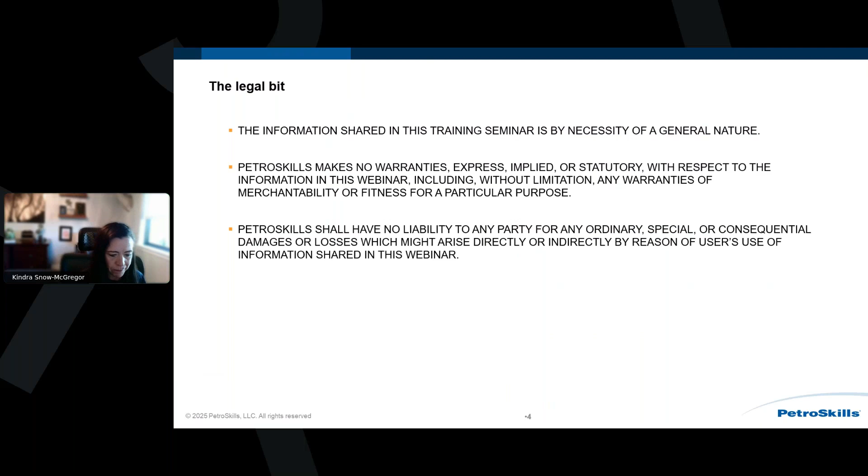What exactly is LNG? Let's take a poll, because I'm curious to see what your thoughts are.

All right, I think we ran that long enough. Notice which components are LNG. 7% said methane only. Are you seeing this on screen? Yes, everyone can see that. Perfect, thank you. 7% said methane only, 33% said methane and ethane, 7% said C1 through C3, and 53% said C1 through C4.

As far as the correct answer, notice LNG can be anything from C1 to C4. What actually sets your LNG composition is determined by the composition of the feed gas going into the plant. LNG is simply natural gas that has been cooled and liquefied to minus 162 C, or minus 260 F.

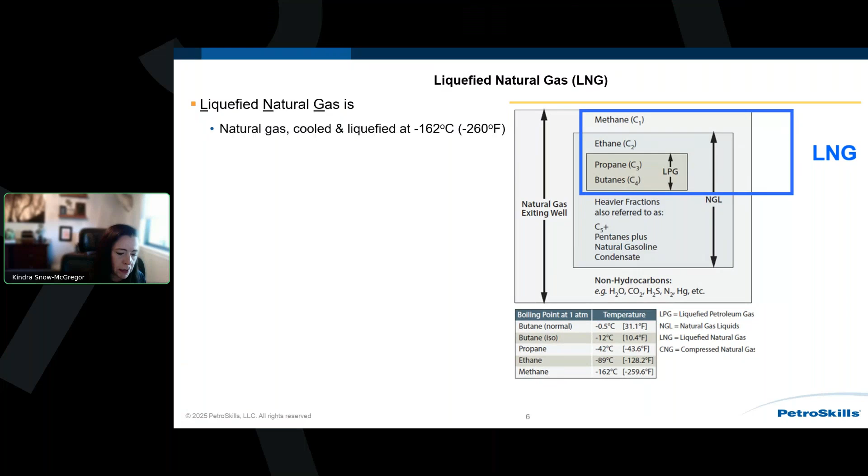It is stored and shipped at atmospheric pressure. So essentially all those big LNG storage tanks and the LNG carriers you see going across the ocean are full of boiling LNG at minus 260 F. We transport the LNG in specialized carriers, trucks, and ISO containers. To put this into perspective, a 175,000 cubic meter ship, the most common carrier size today, contains about 3.6 billion standard cubic feet of gas. So it's a very efficient way to transport a lot of energy around the world.

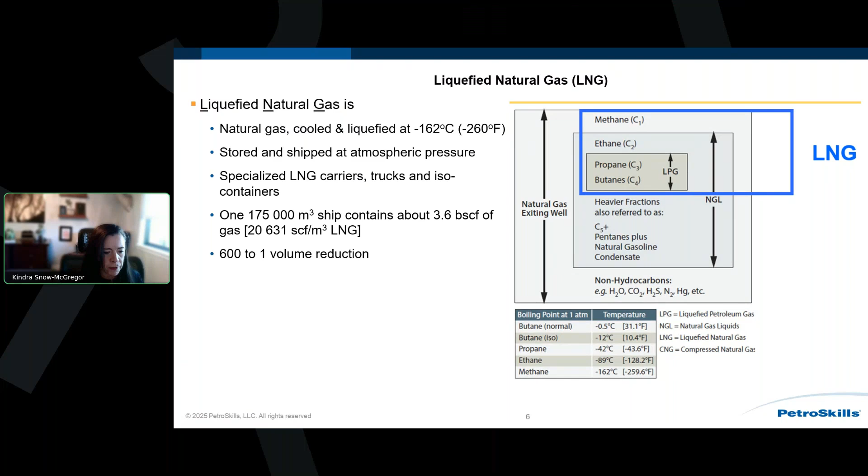As far as the volume reduction, notice a 600 to 1 volume reduction, going from standard gas conditions to LNG conditions. As far as our uses, we're primarily using LNG as fuel for heating and power, but there are also other use cases, such as feedstock for chemical production. We also use it for transportation fuel.

Boy, I don't know why my computer is really locking up. I do apologize for the delay.

Transportation fuel - one of the hottest uses right now is for marine fuel to meet CO2 carbon emissions targets. We also use it as a heat source for manufacturing processes and furnaces.

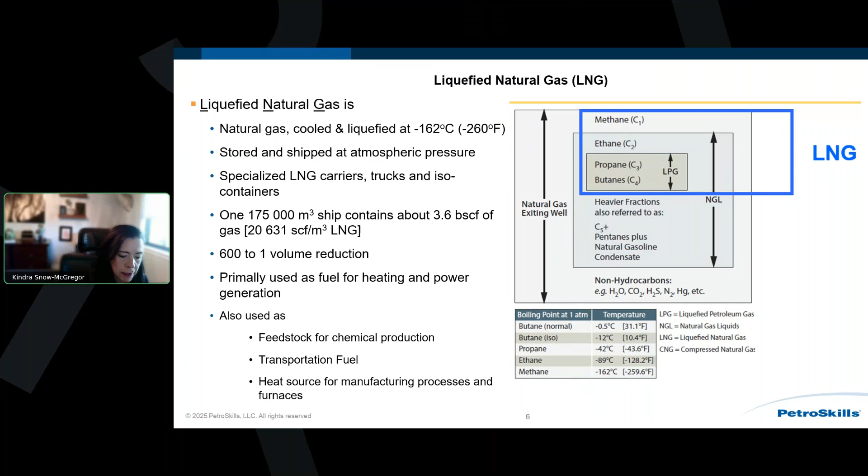Now, as far as a brief history of LNG, let's take another poll, because this one is actually a lot of fun. Let's see what you guys think - when was LNG first created?

All right, I think I will show the results. Notice 0% said 1815, 33% said 1845 - and shockingly enough, that group is actually correct. We first discovered LNG in 1845. 43% said 1942, and 24% said 1964.

Come on. Notice Michael Faraday in 1845 discovered that natural gas could be liquefied.

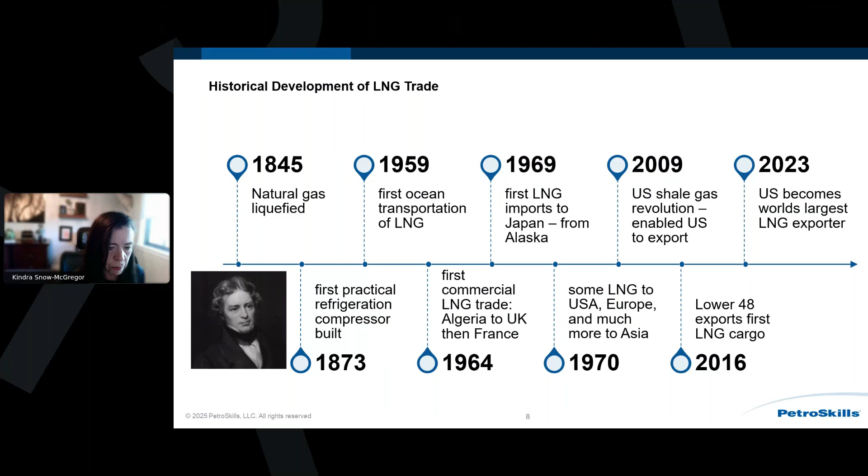Basically, the LNG projects currently under construction are equivalent to 13.3 billion standard cubic feet per day, which is equivalent to 93 million tons per annum.

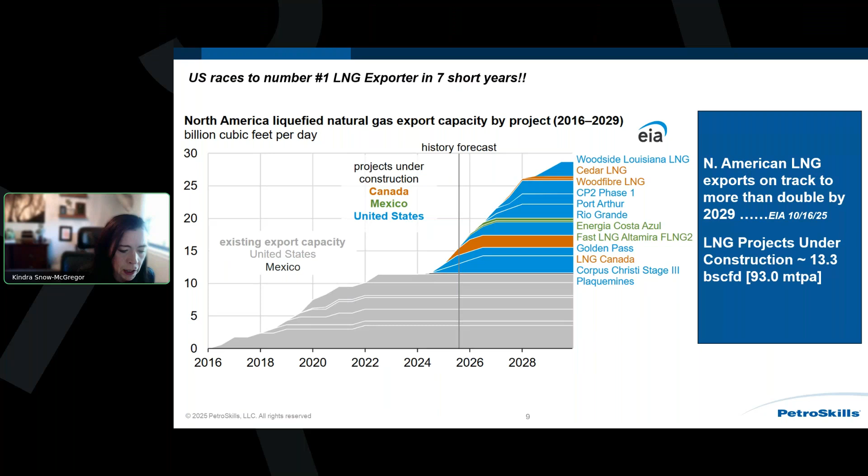As far as the locations of these facilities, notice in the lower 48, all of these LNG export facilities are really gathered in the Gulf of Mexico. And so, as you can imagine, that has put some significant pressure in terms of the labor market and other constraints as a result of all these facilities being located in the same general area.

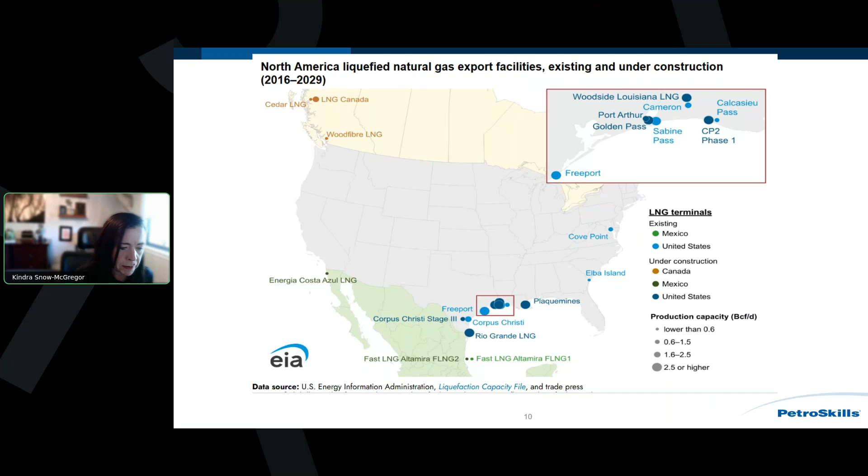Now let's talk briefly about the LNG value chain. Basically, it's a transport business. All we're doing is the LNG allows us to sell gas from locations with excess supply and reserves to nations that have inadequate energy supply.

So buyers would be Japan, Korea, EU, Spain, China, etc. The US is the largest producer, and Japan, China, and the EU right now are the largest consumers. Basically, this allows profit to be made by selling gas into markets where natural gas prices are higher. And this mode of transportation is significantly more flexible than pipeline gas.

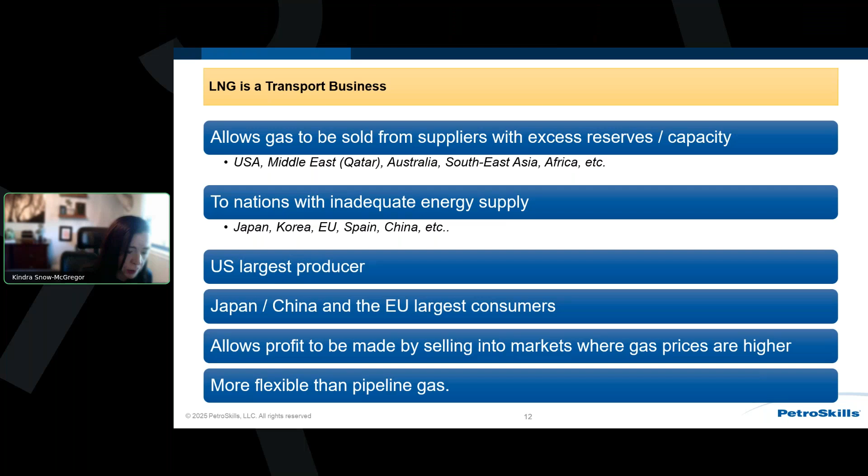Now, this gives you an idea of the traditional integrated LNG value chain, and this is really how the industry got developed. Back in the day, when we first went back to Algeria, basically a consortium of companies got together and decided they were going to build this project. So they had to do the exploration, the licensing, the production. They had to build the liquefaction plant.

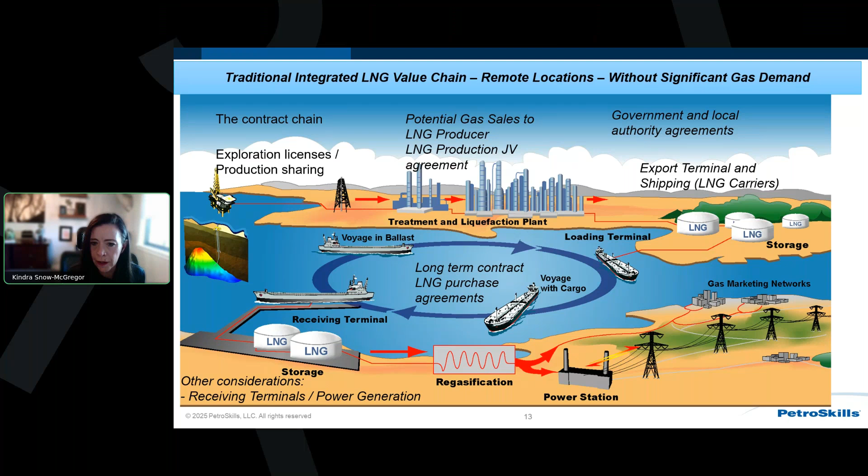They had to build the storage facility. They had to build all of the LNG carriers. And then their partners had to build the LNG receiving terminals, the regas, and the final distribution of the natural gas. Now, as far as the US, our market is significantly different in that we're selling pipeline gas.

So there is significantly less infrastructure required for our LNG facilities as compared to other locations around the world. The benefit of this is we have less infrastructure required, we have plentiful, cheap natural gas for now, and we were also able to build much more flexible contract structures than our competitors overseas.

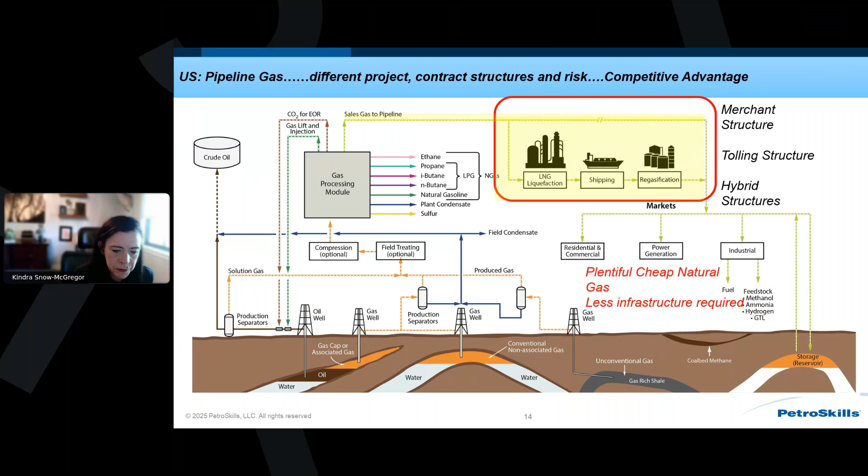In terms of transportation efficiency, this slide shows the comparison between transportation by LNG, pipeline, GTL, or electricity. If you look at this example, an LNG cargo going from Houston to Chicago, that's 940 air miles. If I wanted to send a cargo from Corpus Christi, CCL, over to the UK, that's 6,300 miles or 10,000 kilometers.

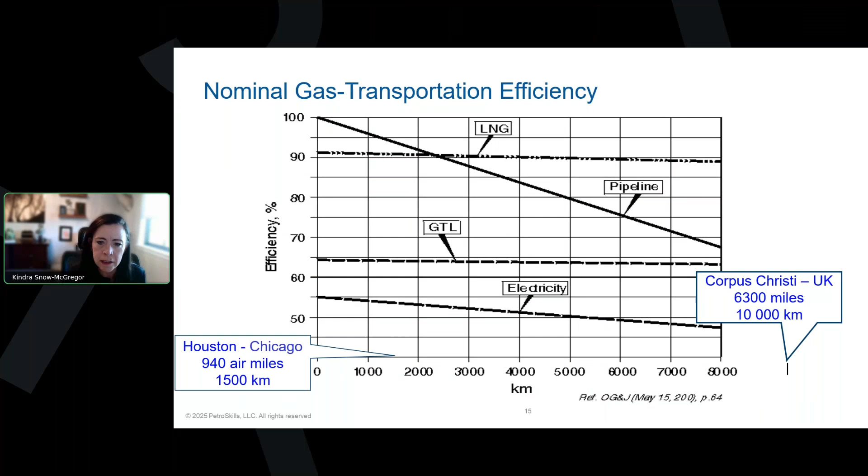The amount of natural gas I still have sitting in that carrier is roughly 90% of the molecules that I put into my plant, so it's a very efficient manner of transportation. Notice the pipeline, there's a limit to how far it economically makes sense to do pipeline transportation, simply because we need to burn the natural gas to keep the drivers for the compression going along the length of that pipeline.

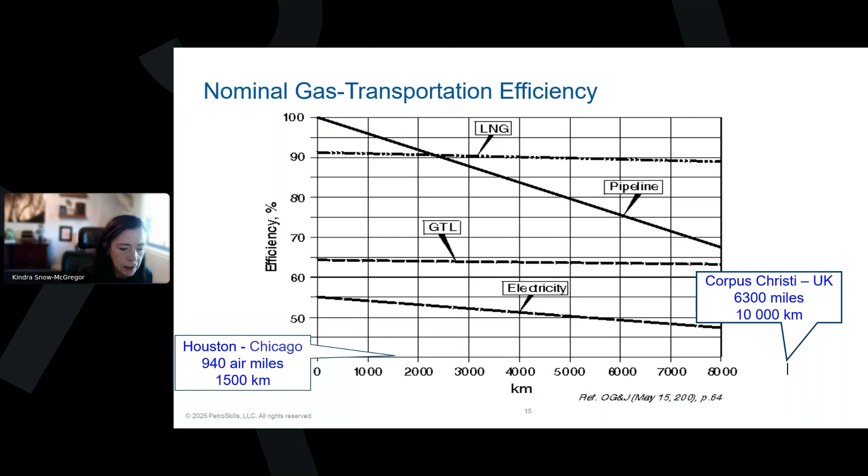Now, as far as our primary advantages here in the US, the first thing is time to market. A number of our LNG export facilities were actually built as import terminals, and those import terminals decided to build export terminals. As a result, their LNG storage tanks are already built and on the ground.

If you think about the infrastructure it takes to build an LNG storage tank, you're probably looking at 3 years. It's a massive project in and of itself and exceptionally expensive, so you're probably looking at $20–30 million.

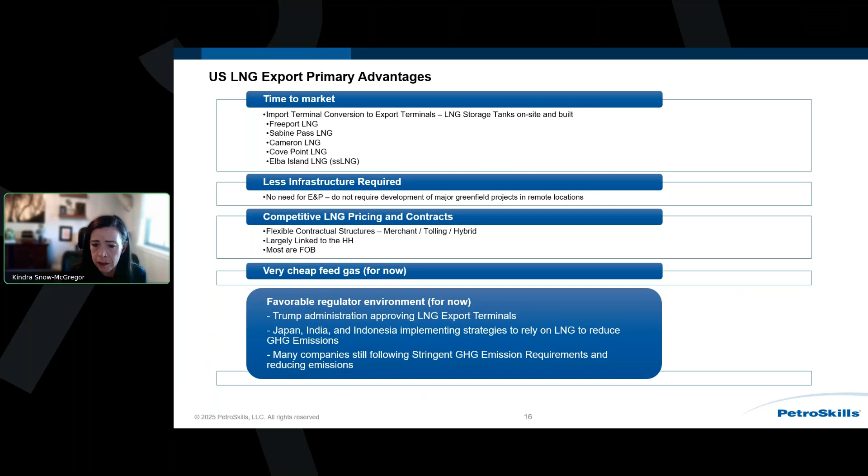We also have much more competitive pricing and contracts, and right now we also have a very favorable regulatory environment. With those combinations, we're witnessing a lot of additional export facilities turning to final investment decisions recently.

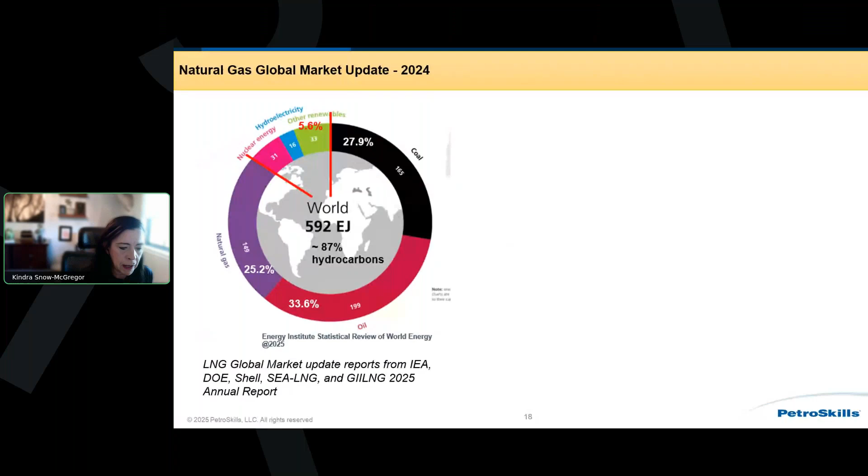Now, as far as our natural gas and LNG trade market, to put the value chain into perspective, it's important to consider where we fit in the global energy demand. Global natural gas consumption provided roughly 25% of the world's energy needs in 2024. 27.6% of this natural gas was traded on the international market, and 48% of that trade was via LNG. So it's a massive international global business.

In 2024, global gas consumption hit a record high, increasing by 2.8%, or roughly 404 billion standard cubic feet a day. As far as the US and where we fit, we produce 26% of the global demand and we consume 22.4%. In 2024, we provided 12% of our total production sold as LNG, basically roughly 12 billion standard cubic feet per day. In 2024, we produced roughly 100 billion standard cubic feet per day.

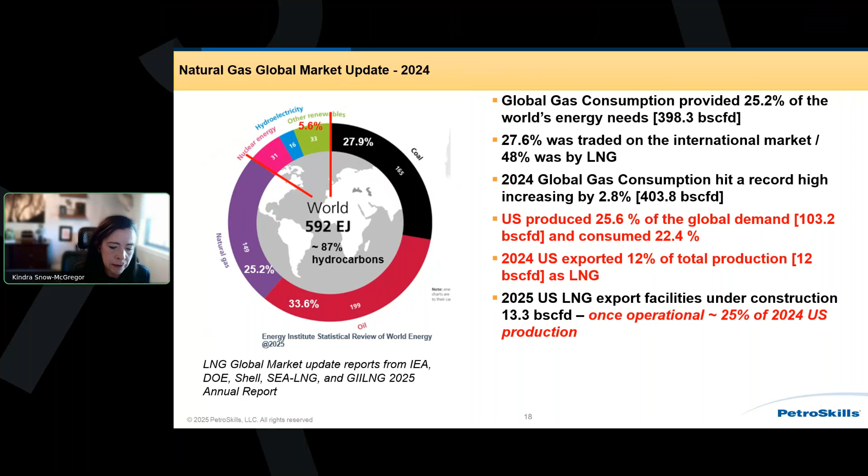In 2025, our LNG export facilities under construction is really quite sobering. You're looking at 13.3 billion standard cubic feet of additional export capacity coming online. Put that together, that's essentially 25% of our 2024 natural gas production. So there could be some implication in terms of our natural gas pricing in the United States as a result of the level of LNG export facility build out.

Now, let's ground ourselves in the LNG trade. In 2024, the LNG trade was roughly 411 million tons, or metric tons. The US supplied 88.4 million tons, that's 21% of the global trade. 53% of those molecules was exported to Europe, and 34% went to Asia. Right now, our capacity is projected to be 181 million tons by 2029.

As far as liquefaction capacity increases, in 2024 we brought 6.5 million tons per annum online. Something's going to happen in 2026. Notice we're going to bring 53.7 million tons per annum of additional liquefaction capacity online. That's 58% coming from the US, 42% coming from Qatar.

When you look at that amount of increase in supply, there's some pretty serious concerns that the LNG market is going to suffer a pricing consequence as a result of the oversupply.

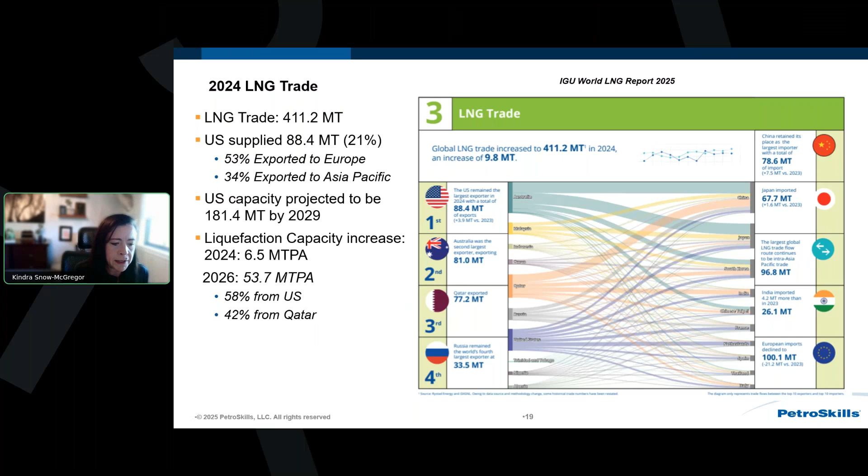Which brings me to this quote from Gas Tech, from the CEO of Total Energies. The US is building too many liquefied natural gas plants, Patrick Pouyanne said on Tuesday, warning it could lead to a long-lasting glut in the market if all planned projects come online. We are building too much, he said during a panel on LNG at the gas tech conference in Milan. We are facing many US projects. We will face oversupply for some years if all these projects come on stream. The interesting thing about this quote is Total Energies decided to go in on the NextDecade Train 4, but they declined to invest in the NextDecade Train 5, which they just made FID on recently.

Now, let's take a look. The whole reason why you guys are here is to have an understanding of what baseload liquefaction technology options we're using in the US. Before we look at this content, let's take another poll.

How much power does an LNG facility consume per million ton per annum produced? These are just very rough numbers, but it'll give you a really good idea of the amount of horsepower, if you will, required to make LNG.

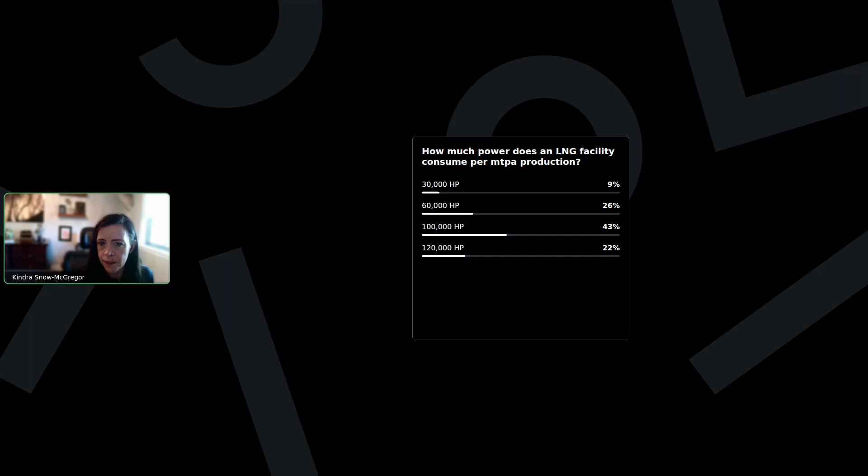All right, let's see what we have. Notice 9% said 30,000 horsepower, 26% said 60,000 horsepower, 43% said 100,000 horsepower, and 22% said 120,000 horsepower. As far as making 1 million ton per annum, roughly it takes 60,000 horsepower per million ton per annum. That is a very rough number, but it gives you an appreciation for the size and scale of these facilities.

So some baseload statistics: notice a baseload liquefaction plant could be anywhere from 1 to 8 million tons per annum.

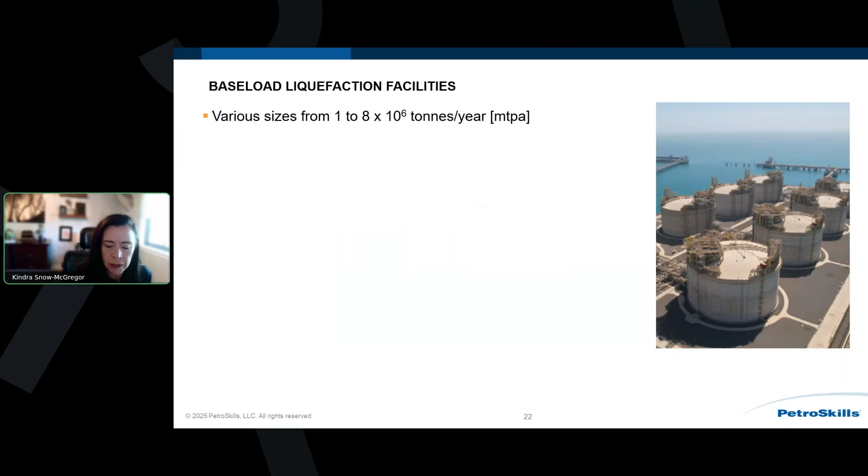As far as our construction, we go from modular trains, which we're seeing used in Louisiana LNG, Stage 3, Corpus Christi, and the Venture Global plants, to mega trains, such as Qatar and the ones that Sabine Pass are considering.

This requires a feed gas rate of roughly 1,400 standard cubic meters, or 50,000 standard cubic feet per ton of LNG. 1 million ton per annum is roughly 4 million standard cubic meters per day, 143 million standard cubic feet per day of feed gas, roughly 45 megawatts and 60,000 horsepower.

5 million tons per annum is the 100,000 - actually, it's much more than that. Notice for 5 million tons per annum, you need 300,000 horsepower to get that liquefaction plant to run, and 715 million standard cubic feet a day. So these are massive facilities.

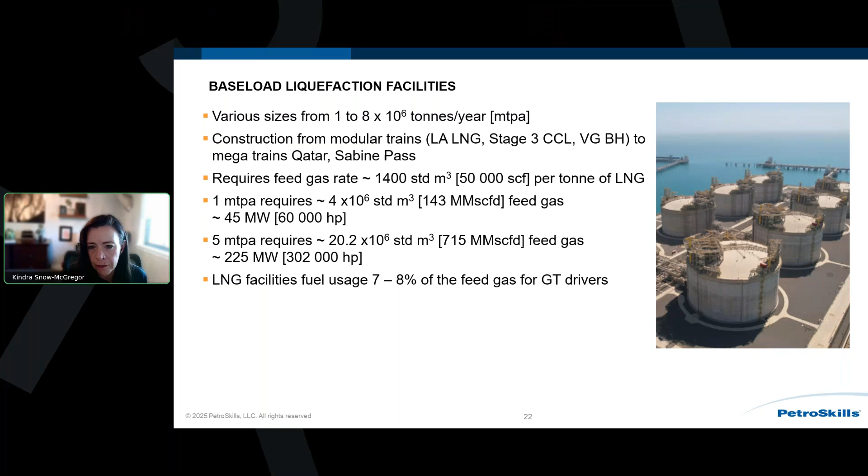If we're going to be using gas turbines for our compressor drives, then you should expect to consume 7 to 8% of your feed gas, and that would be for a modern gas turbine.

In terms of our long-term sales purchase agreements, you're looking at 20 to 25 years with extensions. As far as contract value, notice a 1 million ton per annum contract is valued more than 346 million US dollars, and that's assuming a $6 per million BTU purchase price. For those of you who are interested, the Department of Energy actually publishes our LNG export pricing here in the US. It's public information, and that was pretty average a few months back.

As far as capital costs, you're going to be looking to spend well over $1 billion per million ton per annum capacity. One reference point would be the recent Venture Global 20 million ton per annum CP2 facility, which is quoted to be roughly $28 billion in CapEx.

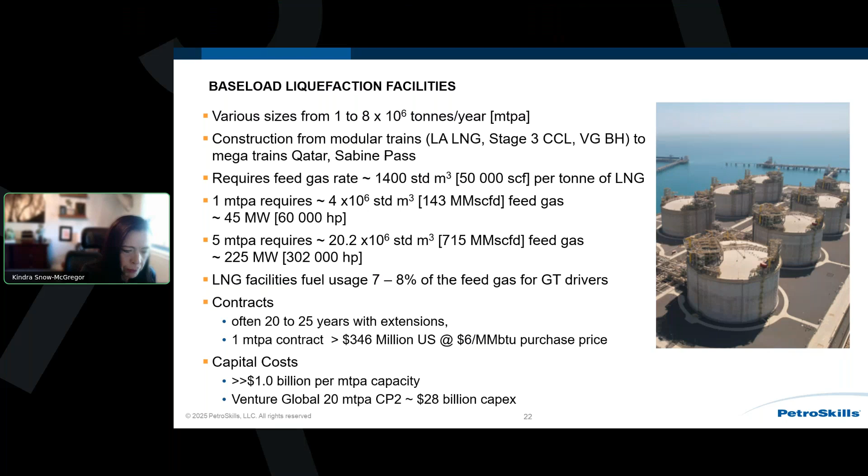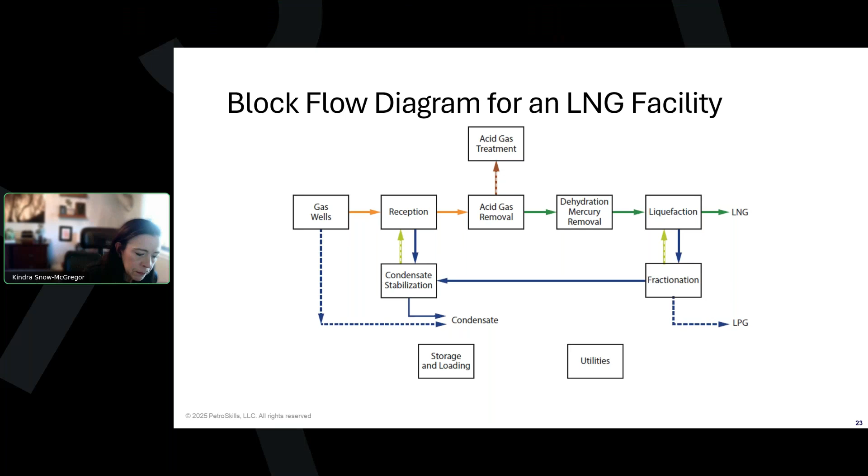As far as these plants, notice I'm showing the block flow diagram. Really, when you look at these facilities, they're a very large gas plant with much tighter contaminant specifications on water, CO2, and H2S, but also on heavy hydrocarbons, because heavy hydrocarbons will freeze at the very cold temperatures that we need to get to in the liquefaction facility. So in many regards, it really is very much like gas plant operations, just larger scale and tighter specifications and much colder, much more powerful refrigeration.

So the first process that I want to talk about is the ConocoPhillips Optimized Cascade. This technology is being utilized at Cheniere Sabine Pass and Corpus Christi trains 1 and 2.

I have this great video that I would like to share, and given the delay in my computer, I'm not sure if it's going to run. I'm going to go ahead and try it. If it doesn't pan out for us, then we will just carry on.

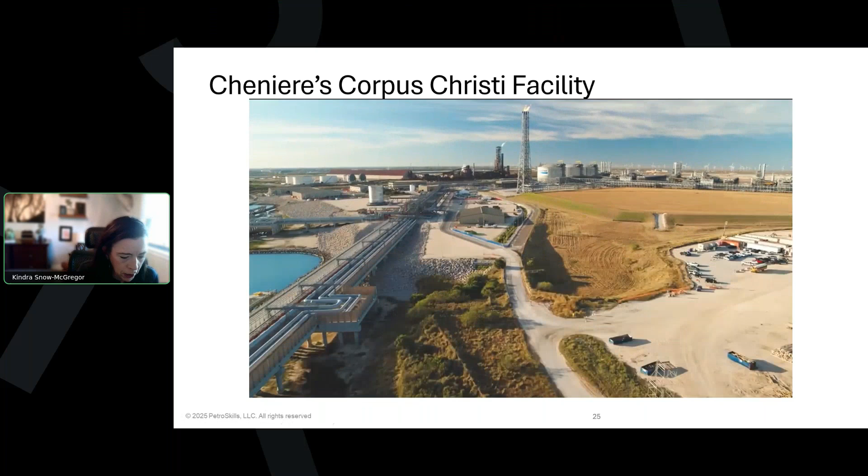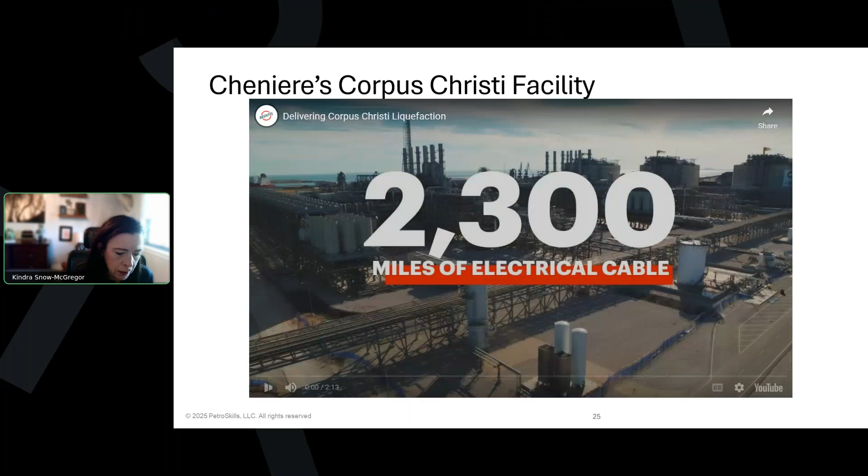I just love that video because it really puts into perspective the size and scale of these facilities that we're putting on the ground, and I think it also helps you appreciate why the capital cost is so significant. So, come on, let's go. There we go.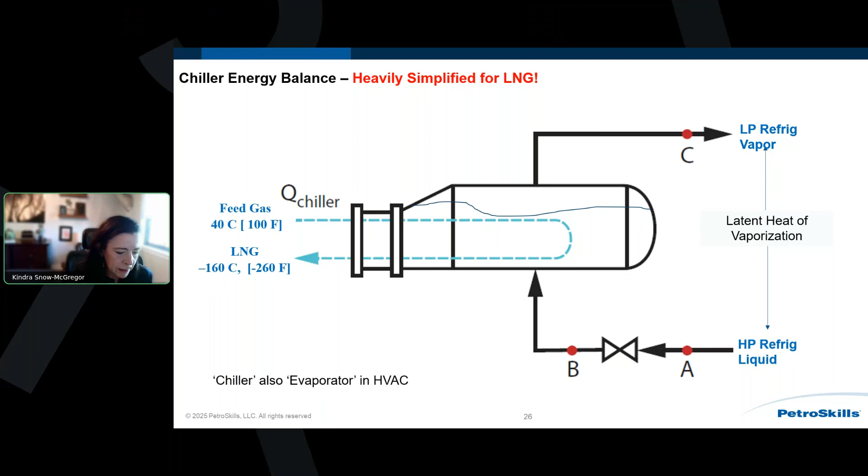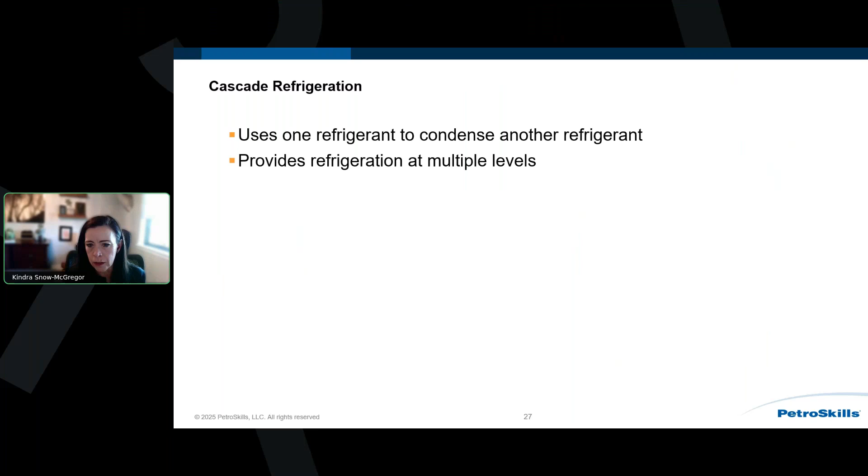For the Cascade refrigeration, basically what the ConocoPhillips technology uses is we're going to use one refrigerant to condense another refrigerant, which will boil at a colder temperature. So I'm getting refrigeration at multiple levels, and this is typically used in ethylene plants and LNG processes. You typically would not see Cascade type refrigeration deployed in a natural gas processing plant.

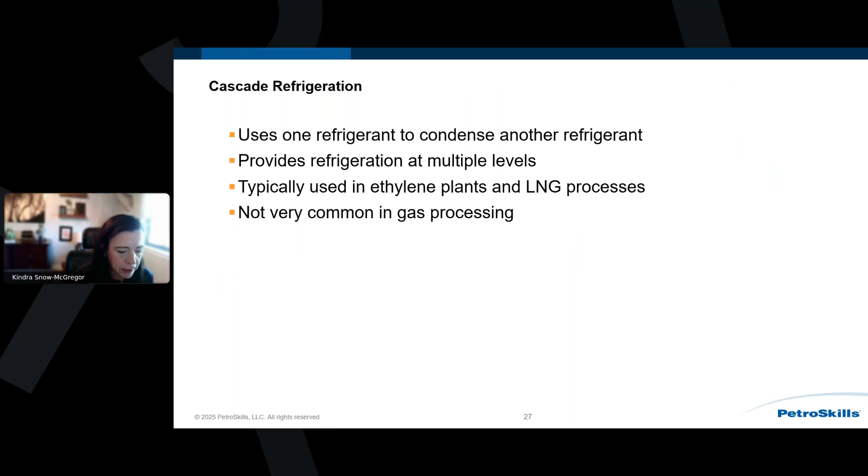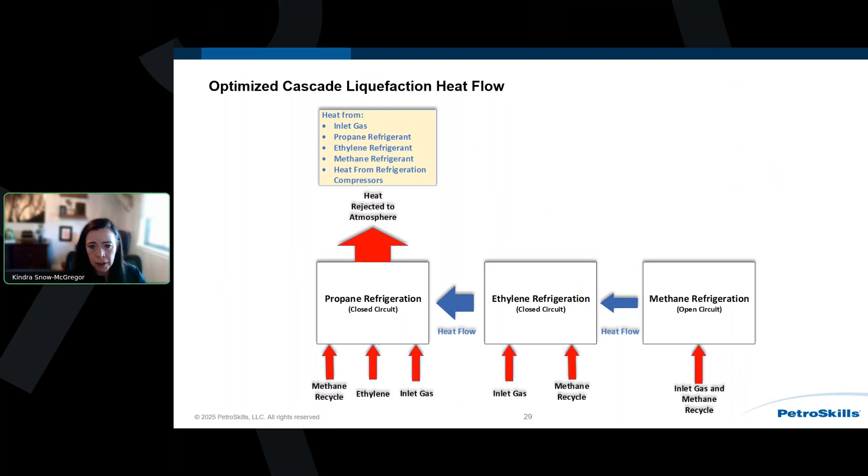Now, as far as the heat transfer equipment that is used in the ConocoPhillips optimized Cascade, the propane and ethylene refrigeration units use core and kettle heat exchangers. Basically, these are large heat exchangers where we have a big pressure vessel where we're boiling the pure component refrigerants. And inside of these vessels, we have brazed aluminum cores where the feed gas, the ethylene, and the methane refrigerants are flowing through depending on where we are in the facility.

Notice we get much tighter temperature approaches with a core and kettle heat exchanger than we could achieve with a shell and tube heat exchanger.

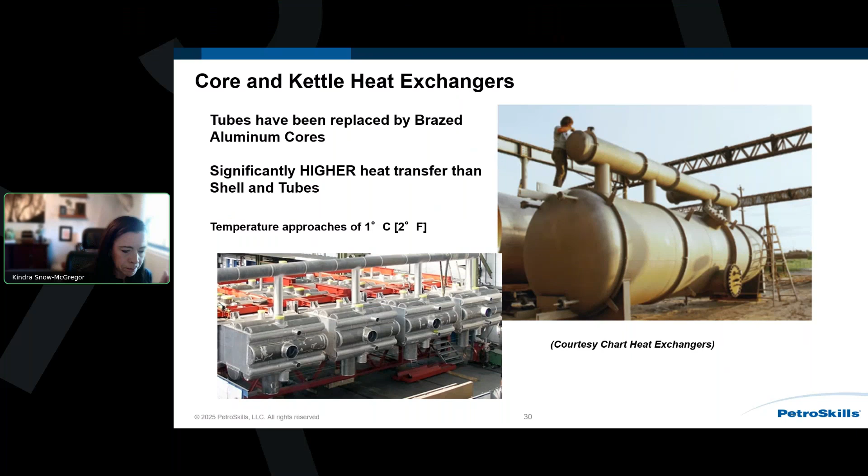As far as the methane and ethylene system, we also have some economizers, which everyone familiar with cryogenic gas plant operations knows are brazed aluminum heat exchangers. And we put all this equipment, including some flash vessels and control valves, inside a cold box. So when you looked at the video and saw that big box going through the facility, that would have been one of the cold boxes used in the liquefaction trains.

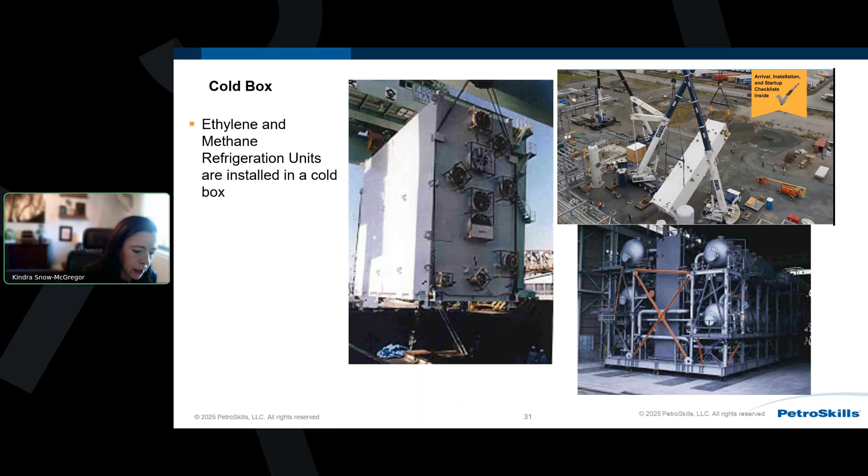Now, the other technology that we have deployed in the US is the APCI C3MR, that's Air Products and Chemicals Incorporated Propane Pre-Cooled Mixed Refrigerant. The liquefaction trains that either use or will be using this technology include Freeport, Cameron, Lake Charles, Golden Pass, and NextDecade.

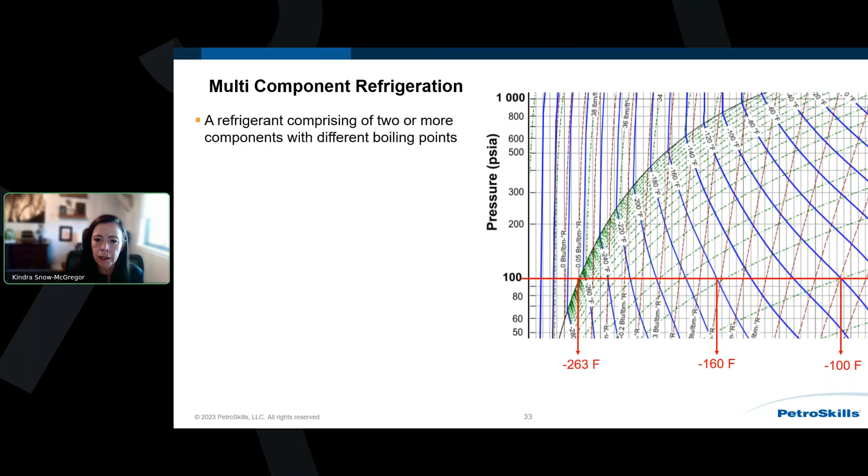Now, the difference with this APCI C3MR is now we're going to deploy a mixed refrigerant. So when we have multi-component refrigeration, basically what we're doing is we're making a refrigerant out of different components, and these components obviously have different boiling points. The way this works is that the lowest temperature boiling components, for example, nitrogen and methane, are going to evaporate before the higher temperature boiling components do.

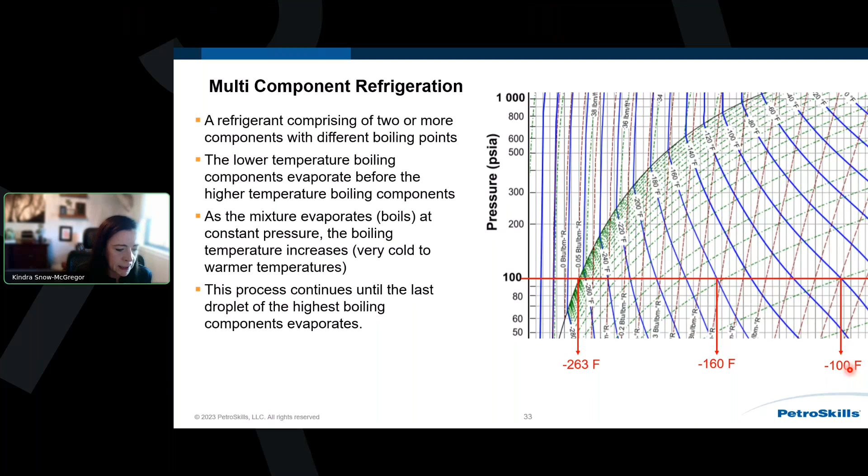So if I were to boil this mixed refrigerant at constant pressure, notice if I'm boiling this one at 100 PSIA, I'm going to start boiling at minus 263, which is a really convenient boiling temperature if I'm trying to make LNG. And you can see as that refrigerant continues to boil, my composition changes from light ends boiling off to heavier and heavier components. The refrigerant actually boils at warmer temperatures as the mixture sits inside those heat exchangers and boils off. This process continues until the last heavy components evaporate.

Now, this gives you an idea of the APCI C3MR LNG process. Notice the whole front end is just like a gas plant. I have acid gas removal, then I go through mol sieve dryers, and notice we're using propane refrigeration chillers, gas chillers here to, in this case, reduce the water load going into my mol sieve dryer. And then we're going to get this gas even colder.

This would be an older type design where we have the heavies removal column not integrated into the main cryogenic heat exchanger, which is this big coil wound heat exchanger at the bottom here. We go through another propane pre-cooler.

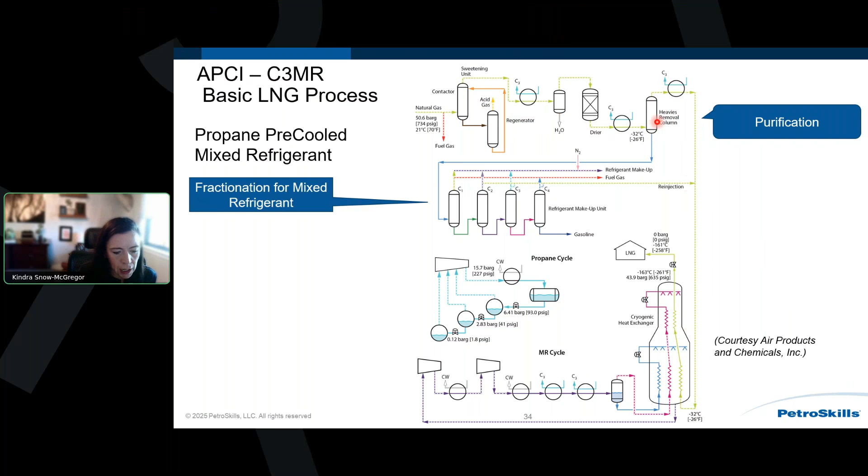And you can see for this plant, we're taking the heavies that we've removed from the natural gas and sending them into a fractionation train. Now, I will only do that if I have sufficient NGLs in the inlet gas to justify a fractionation train. But the key point here is notice we need to have these compositions available to us to make up our mixed refrigerant composition.

This down here shows you the propane pre-cooling system. So in this example, we have 3 stages of propane pre-cooling. And then lastly, we get to the mixed refrigerant system. And this mixed refrigerant system is what's supplying the spiral wound heat exchanger.

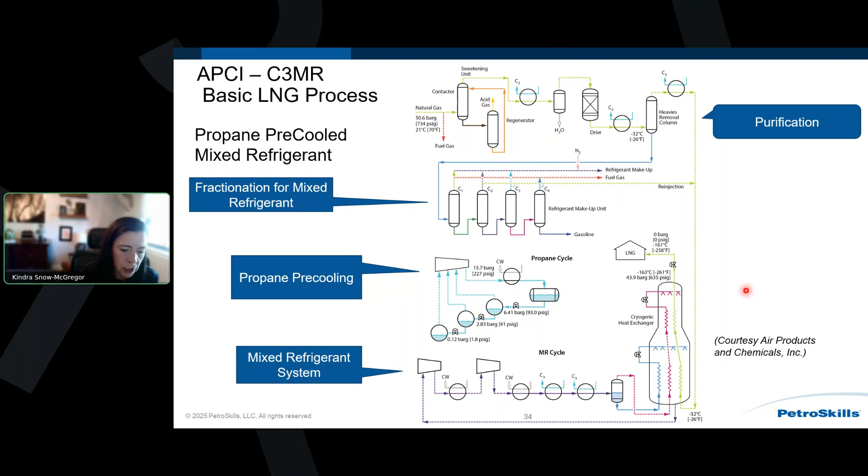Now, we'll take a look at how this process works in more detail, but at a high level on the spiral wound heat exchanger, what you'll see is that all of my hot fluids are flowing up. So my natural gas is flowing upwards. My mixed refrigerant liquids are being subcooled in a coil flowing upwards. I also have my mixed refrigerant vapors, my light mixed refrigerant vapors being condensed and subcooled. And then my cold fluids are downward flow. So essentially I'm raining my mixed refrigerant compositions down all these coils in this very large pressure vessel.

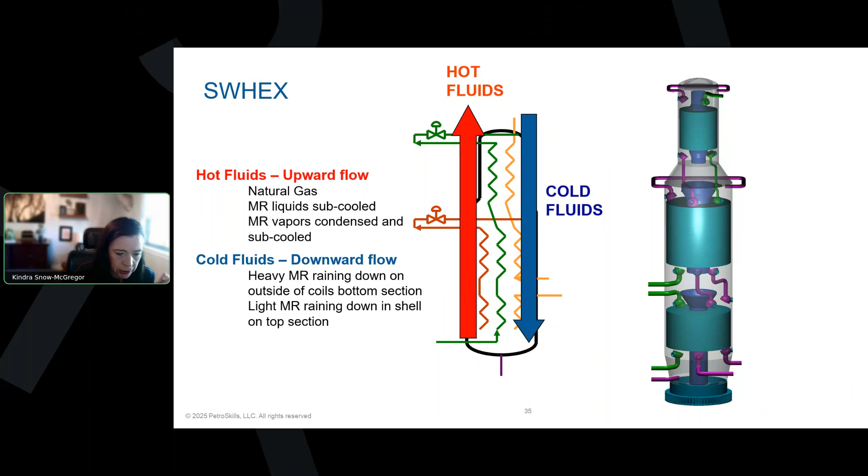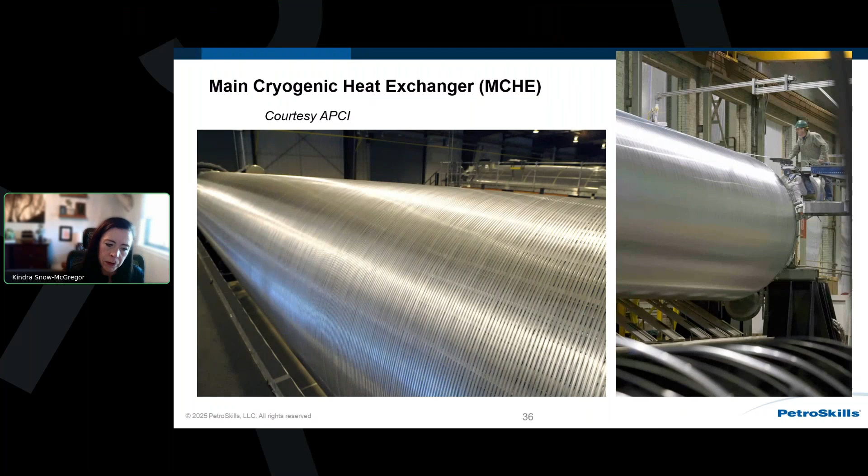And so if we look at how this equipment is fabricated, notice this gives you an idea of what those coils look like. So the natural gas and the various MR streams that are either being subcooled or condensed and subcooled will be flowing through these coils, and all those coil bundles are being installed in this very large pressure vessel. And this gives you an idea of what it looks like when we're transporting them.

Now, let's talk about how this mixed refrigerant behaves in the main cryogenic heat exchanger. Notice the first thing, I have my mixed refrigerant supply. I have a light mixed refrigerant and a heavy mixed refrigerant that is being produced from this mixed refrigerant separator. In this pass right here, I'm subcooling the heavy mixed refrigerant. And then in this other pass, the pink pass, is where I'm condensing my light mixed refrigerant. And in this coil over here is where my feed gas is coming in. I'm condensing and subcooling that feed gas into LNG.

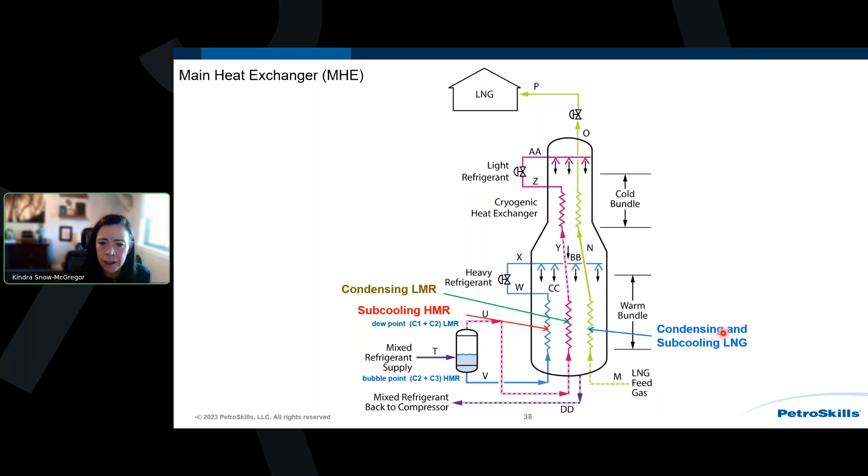Now, you can see I have a JT valve. We rain our heavy mixed refrigerant down across the coil bundle, this lower warm bundle down here. This is an older design. Newer modern main cryogenic heat exchangers have 3 bundles, not 2.

But at any rate, if we carry on and notice the light mixed refrigerant is being subcooled in the cold bundle up here, and my LNG carries on up into the cold bundle, and that is where I will be subcooling the LNG, from which I go through maybe a JT valve. This could be a liquid expander or something, but we need to have a way to let the pressure down to our final LNG storage tank.

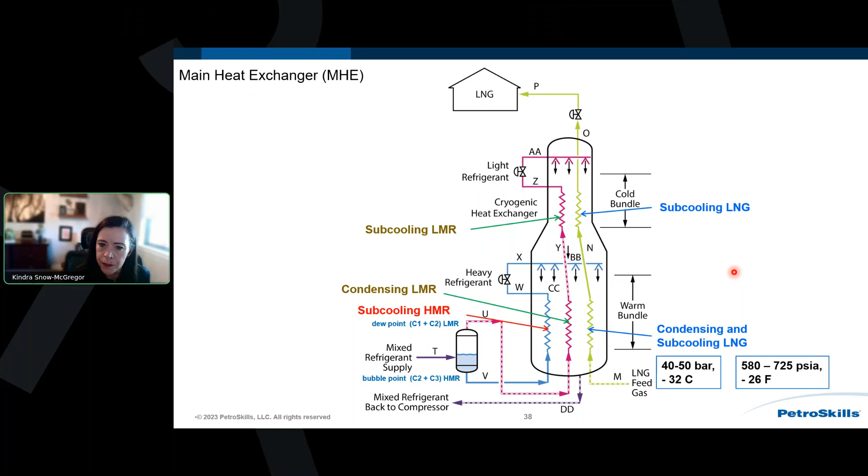And so to give you an idea of the temperature and pressure profile in here, my natural gas could be coming in anywhere from, say, 580 to 725 PSIA, 40 to 50 bar, minus 32 C. I leave the warm bundle at 35 to 40 bar, maybe minus 80 C, or 500 to 580 PSIA and minus 112. And then at the very top, I would be exiting 20 to 40 bar, minus 150 C. And then that'd be 290 to 580 pounds and minus 238 F.

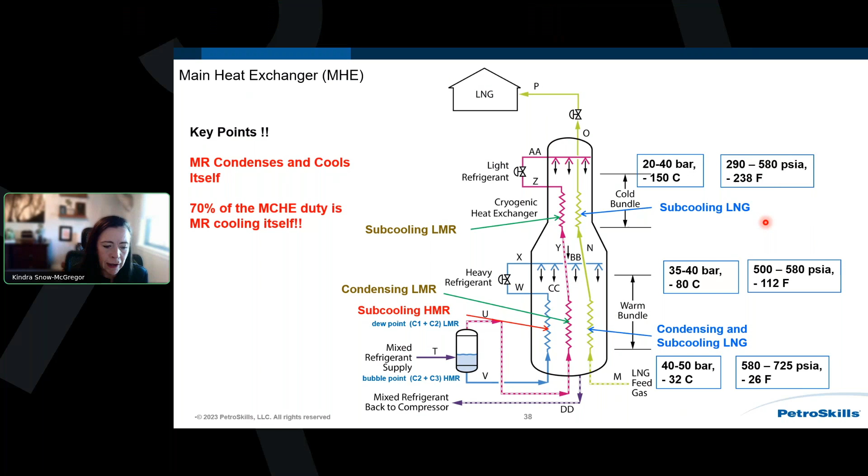Some key points. First thing, the mixed refrigerant is condensing and cooling itself. And so it's kind of hard to get your head around that, but basically 70% of the main cryogenic heat exchanger duty is actually the MR circulation required to condense and cool itself. So really fascinating technology. It's really neat stuff.

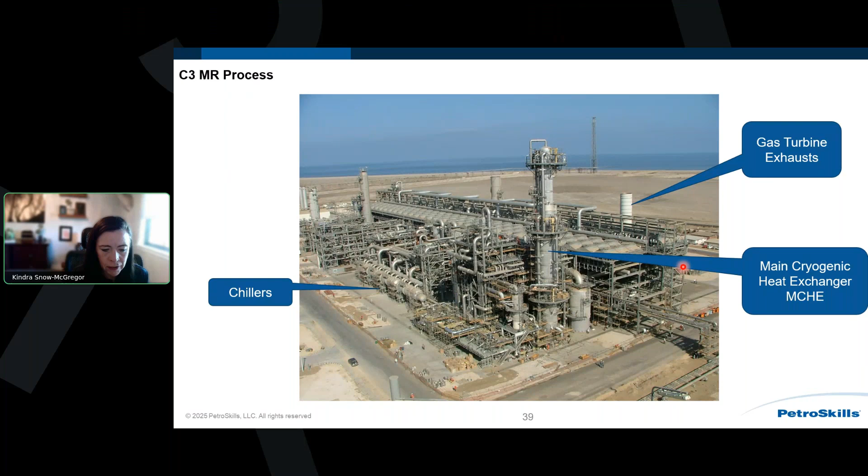This gives you an idea of what the equipment looks like on the ground. You can see the propane chillers are over here. There's the main cryogenic heat exchanger. There's the gas turbine exhaust. And notice again all the propane condensers that we have.

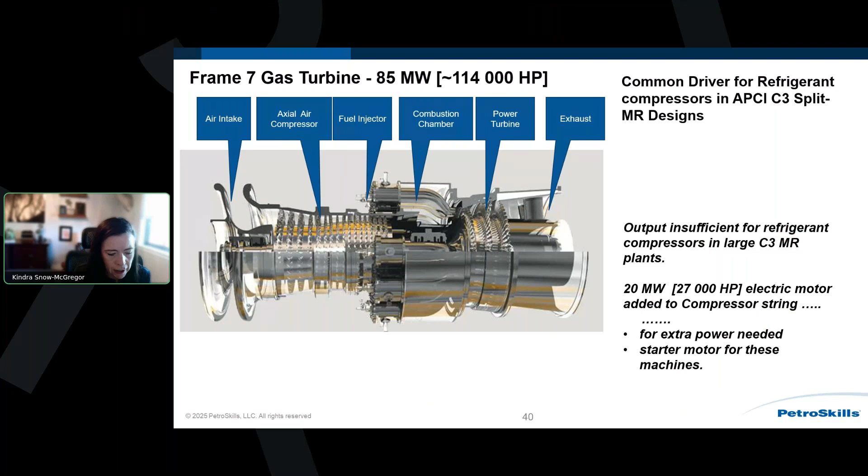As far as common drivers for these plants, this would give you an example of a frame 7 gas turbine, 85 megawatts, 114,000 horsepower. And so that's a common driver for an APCI C3 split MR design. This size is actually insufficient for the really large plants that Qatar has. In order to get this gas turbine started, notice I need a 20 megawatt or 27,000 horsepower electric motor added to my compressor string. So big equipment and a lot of power demand required for these facilities.

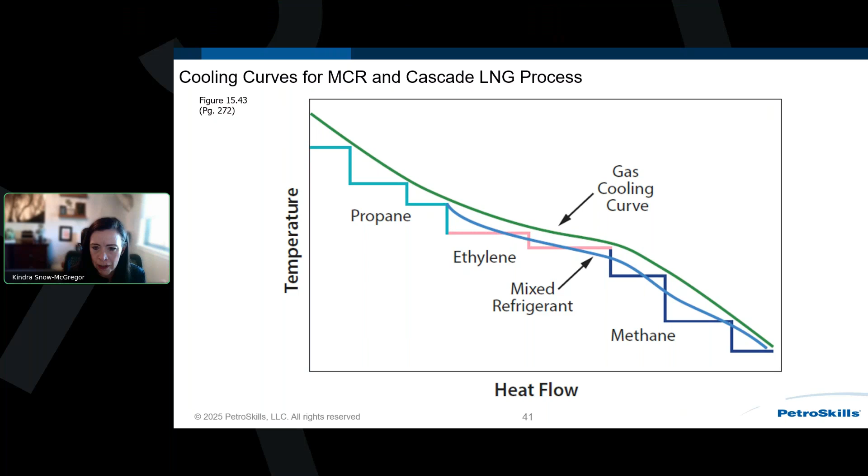The APCI requires much less equipment. I have a slightly better thermal efficiency because of keeping that mixed refrigerant composition closely matched to my cooling curve. The ConocoPhillips has some advantages in terms of ease of startup and shutdown - it'll stay colder for longer, and we can also build in some operational flexibility.

Now, as far as how this technology works, basically IPSMR stands for Integrated Pre-Cooled Single Mixed Refrigerant. This is very similar technology to what is being used in the BakerHughes Venture Global trains, and the max size for these types of trains might be roughly 2 million tons per annum.

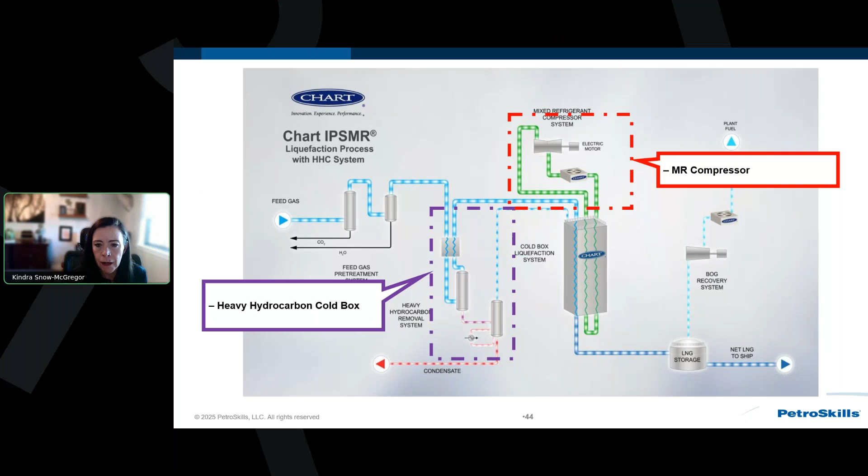Now notice in this type of lineup, we have our heavy hydrocarbon cold box - we need to remove the heavy hydrocarbons first. You can see we have our mixed refrigerant compressor and circuit, and then we also have an LNG cold box.

Now, when we put all these pieces together and look at the type of equipment - looking at this heavy hydrocarbon cold box, notice if you zoom in, we could use expander compressors. This looks very much like a cryogenic gas plant that you'd expect to see anywhere else, other than we have a different way of doing the reboiling down here, for example, because I'm actually using hot gas to stabilize the NGLs that are leaving.

So first thing, we have a heavy hydrocarbon cold box. You can see we're using a brazed aluminum heat exchanger here to do all of the heat transfer, and here is the mass transfer column. Here's the reflux drum and reflux pump.

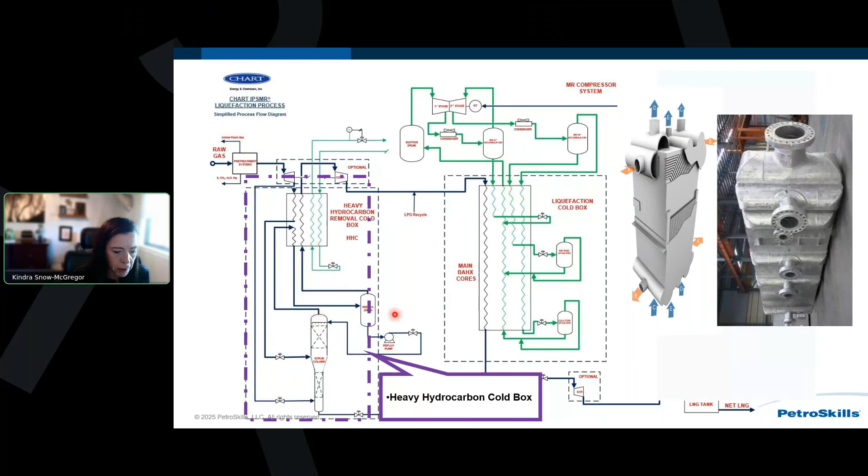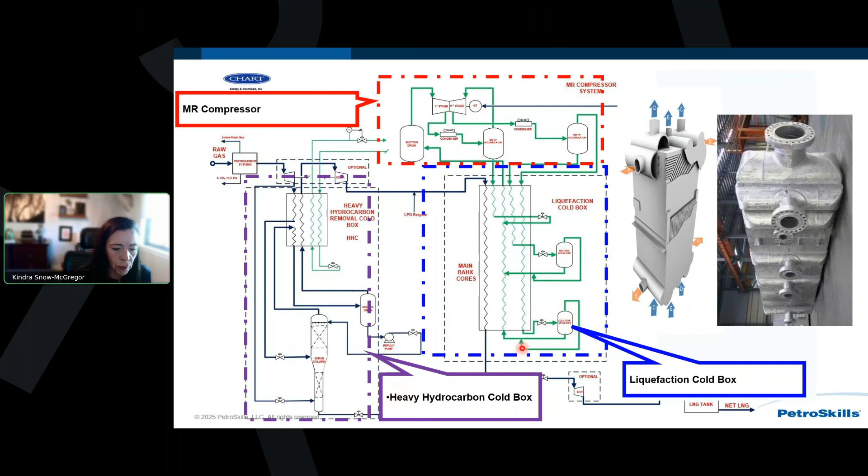As far as the MR compressor, notice this is a two-stage machine, and we have a number of interstages. We'll talk about how this MR refrigerant works here in a moment, but this MR compressor provides all the cooling that we need for the liquefaction cold box.

Now, as far as how this mixed refrigerant works, I'm going to start at the bottom here. Notice this is my very light mixed refrigerant, and essentially we're boiling our mixed refrigerant composition as we move up this pass in the brazed aluminum core. Here's my combined mixed refrigerant composition going into the suction drum.

I go through my first stage of compression, I have an interstage cooler, and now I have my interstage knockout drum. You can see I have a very heavy mixed refrigerant being produced in this interstage knockout drum. This mixed refrigerant is going to give us the warmest boiling temperature in the mixed refrigerant composition that we have. This mixed refrigerant is fed into the top pass here - I'm subcooling it, and then I'm boiling this heavy mixed refrigerant up in this pass right here.

Now, if we follow the lighter mixed refrigerant composition on, notice we go through a second stage of compression, go through a discharge cooler or condenser, and here is my mixed refrigerant separator. I have my light mixed refrigerant coming out of the top and another intermediate heavy mixed refrigerant coming out of the bottom. This liquid mixed refrigerant is being subcooled.

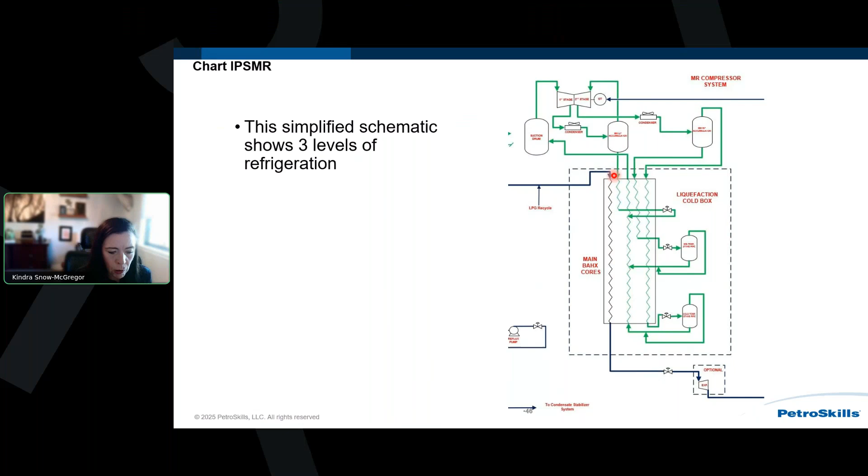And then lastly, we follow our very light mixed refrigerant, which is being condensed and subcooled in this pass. We separate out that light mixed refrigerant, vapor and liquid, from that JT valve, and we boil at the coldest temperature at the bottom now and flowing up. So you can see my feed gas is coming in warm at the top, and I exit as LNG out the bottom. The flow distribution is completely different than what we had in the APCI C3MR.

In this instance, my hot fluids are flowing downward. That includes my natural gas, my MR liquids being subcooled, and my MR vapors being condensed and subcooled. All of my cold fluids, which are my mixed refrigerants, are boiling upwards. So that's a different lineup, but it gives you an idea of how the Chart IPSMR technology works. As far as these brazed aluminum cores, they're just a little bit more complex than what you'd find in a gas subcooled expander plant process.

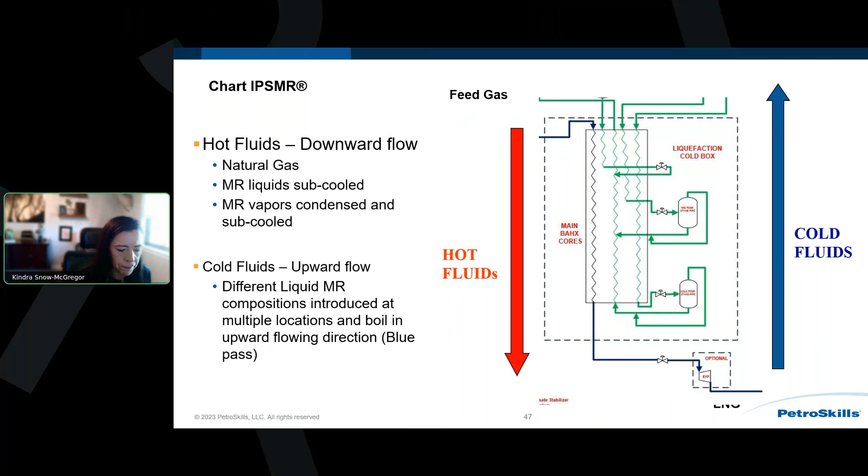Now, as far as the last technology we have to discuss, we have our BakerHughes NMBL technology. This is what Venture Global is utilizing, and so is Woodside Louisiana LNG and Commonwealth LNG. Again, this is a single mixed refrigerant technology.

Parker advised that on that last video, you guys were unable to hear my audio. So hopefully I got that fixed. We'll see if this one works.

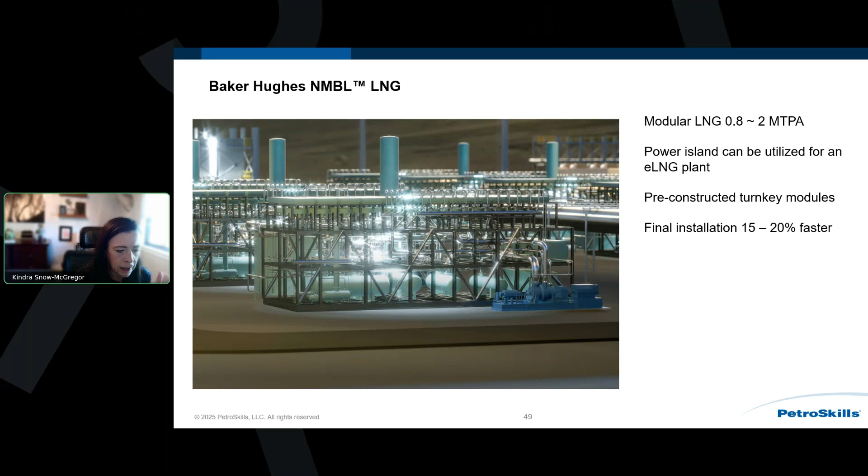As far as this BakerHughes NMBL technology, a modular technology with capacity of 0.8 to 2 million tons per annum, we can use a power island, which can be utilized for an ELNG plant. It's pre-constructed, turnkey modules, so the idea is that your final installation could be 15 to 20% faster. In this market, if we can get our liquefaction capacity online and to market 15 to 20% faster, that can give you pretty significant competitive advantage, which I think for those of you who've been following things, you've seen Venture Global do. Now, let's take a look at how this technology works.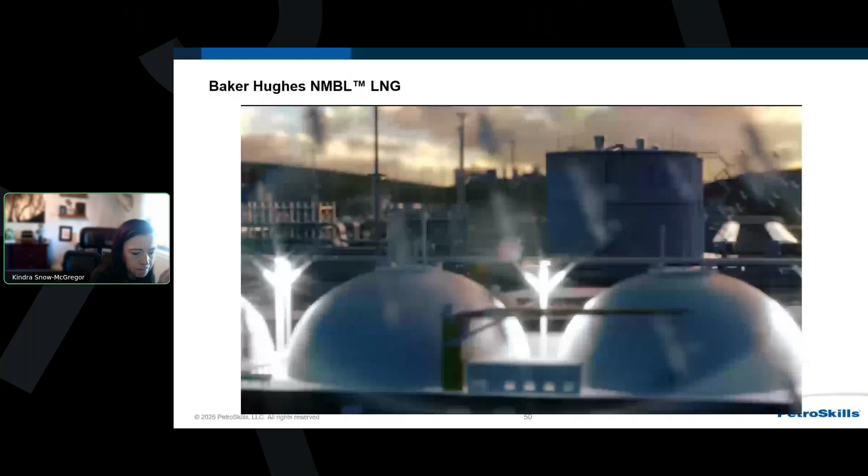Parker says there's still no audio. I think that's okay, I believe all of the things are animated, so just read the screen.

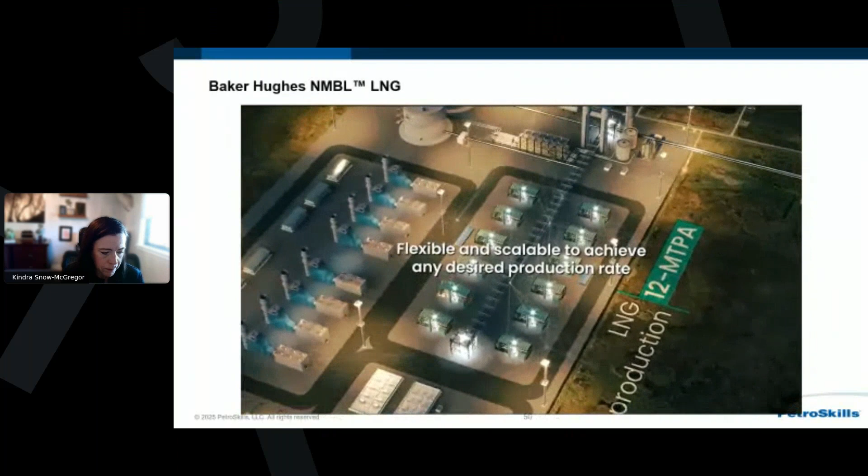All right, so that gives you an idea of what the modules look like. In terms of additional details, here's the process module, so that's everything included on this block one: my air coolers, vessels, electrical control cabins, separators, and scrubbers. Over here you can see the MR compressor, which can use an electric motor or gas turbines, just depending on your preference. In terms of the storage vessel, this tall guy here is the mixed refrigerant surge vessel or storage vessel. On the back end you see the brazed aluminum heat exchanger, the LNG cold box, and then the E-room or soft starter.

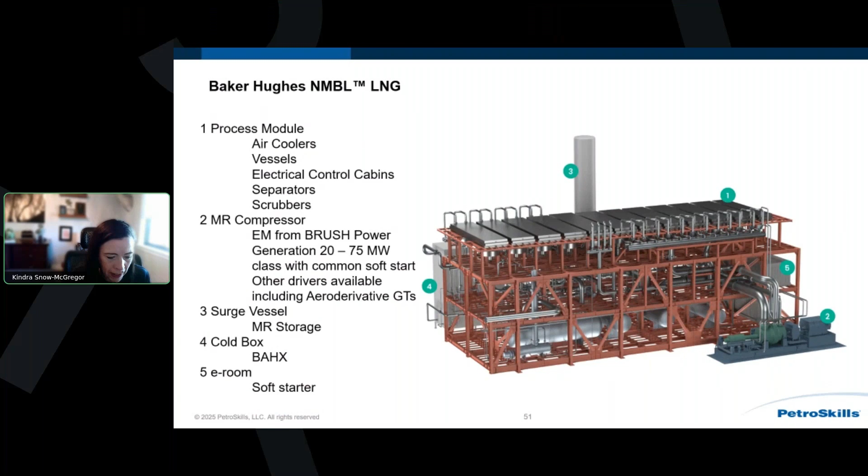So with that, you guys, it seems as if I cruised right through that conversation. If there's any questions, I would be more than happy to answer or discuss anything you guys would like to ask or know about. And again, apologies, I don't know what the thing was with my computer this morning. Apparently it didn't have enough coffee. I'm sorry.

All right, quiet group. I'm happy to talk more details about any of the technology if you guys are curious.